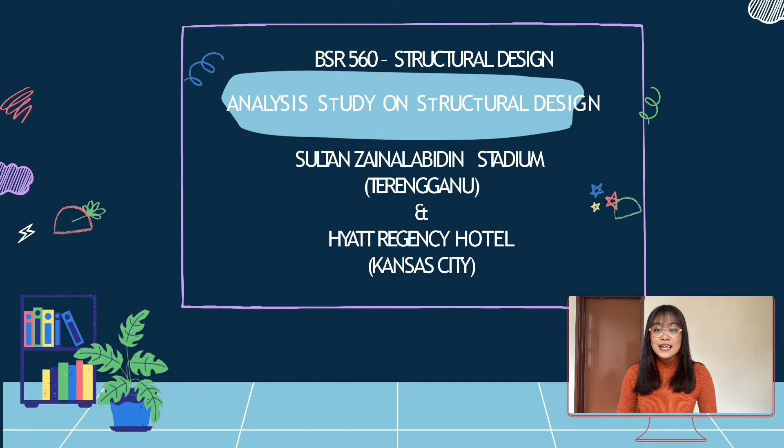In this video, we will be discussing our topic on analysis study on structural design at Sultan Zainal Abidin Stadium, Kuala Terengganu, and Hyatt Regency Hotel, Kansas City.

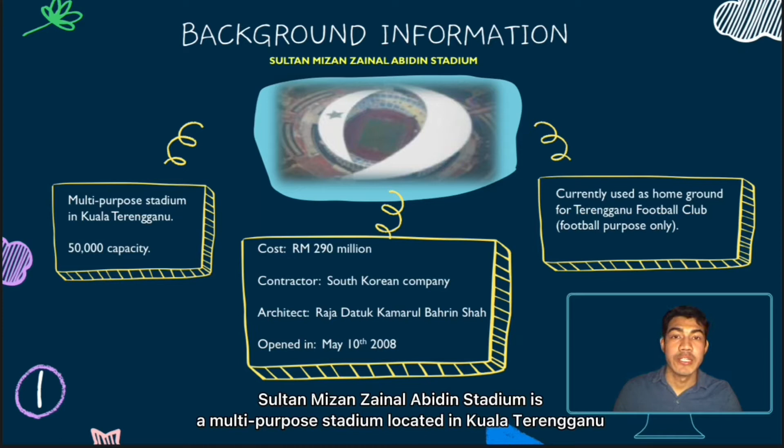Hi, my name is Muhammad Rafiq Zuhair, and I'm going to talk about background information of Sultan Mizan Zainal Abidin Stadium. Sultan Mizan Zainal Abidin Stadium is a multi-purpose stadium which is located in Kuala Terengganu that is capable of accommodating 50,000 people at one time.

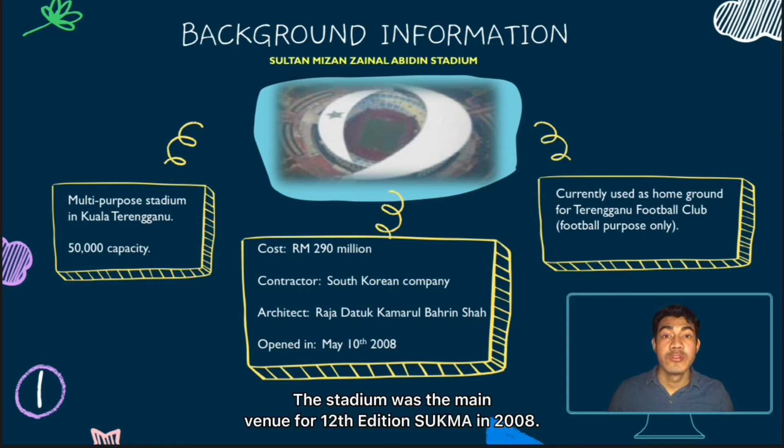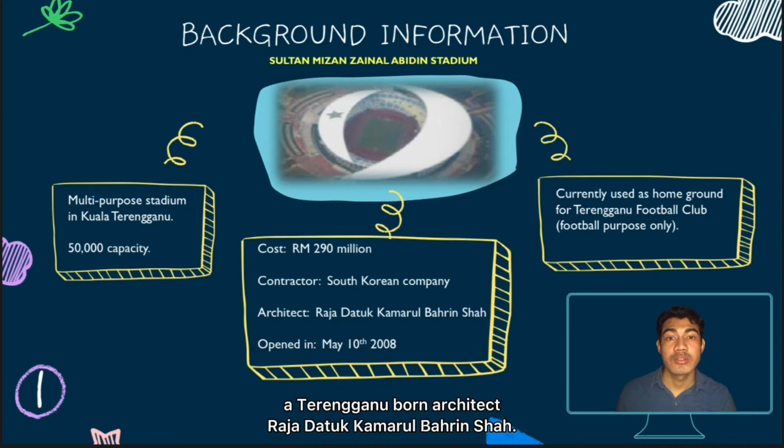The stadium was the main venue for the 12th edition of Sukma in 2008. It was constructed by a South Korean company and designed by a Terengganu-born architect, Raja Datuk Kamarul Bahrin Shah. The stadium, which cost approximately 290 million ringgit, began construction in 2005 and was officially opened on 10 May 2008 after the inauguration by Yang di-Pertuan Agong Tuanku Mizan Zainal Abidin.

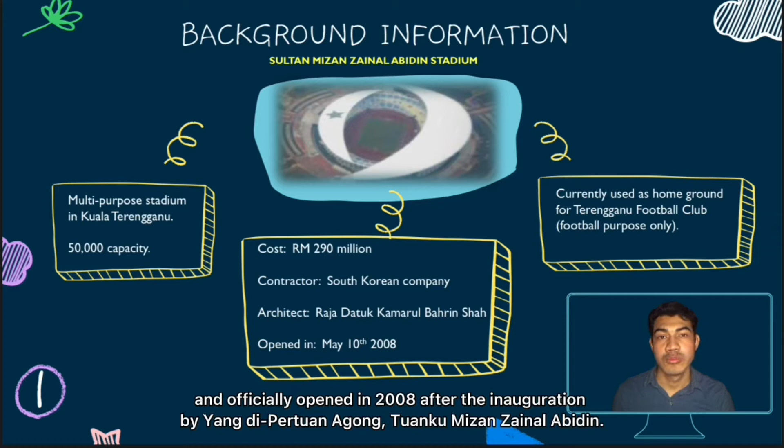Sultan Mizan Zainal Abidin Stadium experienced 2 incidents of roof collapse since it was built. The first incident was in June 2009 with no injuries recorded. The second was in February 2013, with 5 injuries recorded after another part of the roof collapsed during demolition works. Now I'm going to explain the details of the accident at Sultan Mizan Zainal Abidin Stadium.

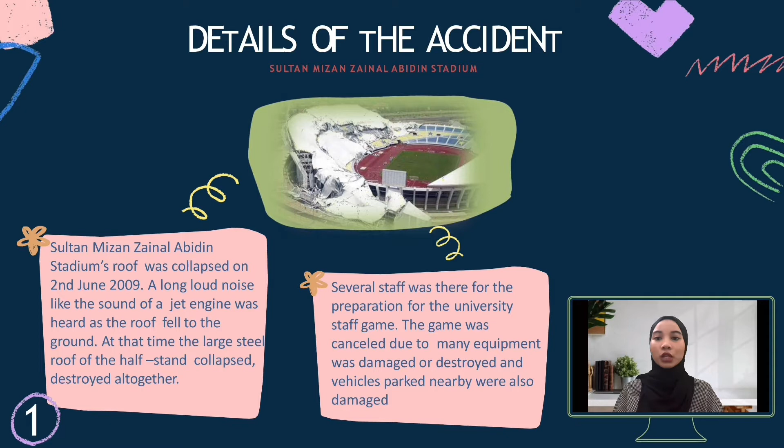Sultan Mizan Zainal Abidin Stadium's roof collapsed on 2nd June 2009. A long loud noise was heard as the roof fell to the ground. At that time, the large steel roof of the half stand collapsed and was destroyed altogether. Several staff were there preparing for a university staff game. Unfortunately, the game was cancelled as much equipment was damaged or destroyed, and vehicles parked nearby were also damaged.

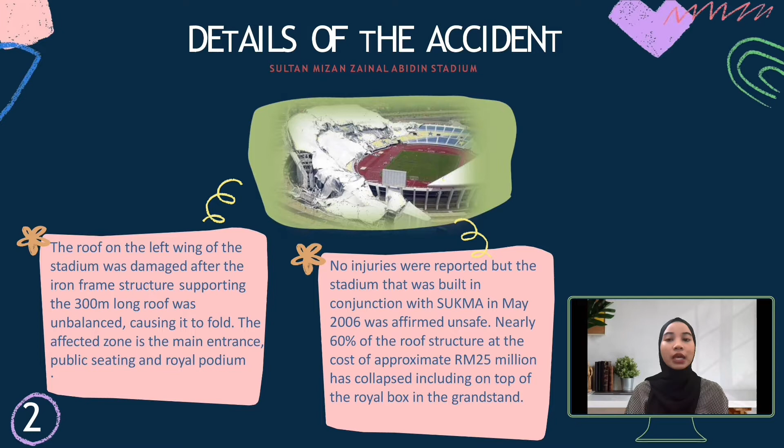The roof on the left wing of the stadium was damaged after the iron frame structure supporting the 300-meter long roof became unbalanced, causing it to fold. The affected zone was the main entrance, public seating, and the royal podium. Fortunately, no injuries were reported. Nearly 60% of the roof structure, at a cost of 25 million, collapsed, including on top of the royal

box in the grandstand. Hi, my name is Mimi Nursyada binti Ahmad Hidayat. I will explain about the building background for Hyatt Regency Hotel at Kansas City.

In 1978, the owner Crown Center Redevelopment Corporation commenced a project to design and build a 40-story hotel with 750 rooms, located at 2345 McGee Street, Kansas City, Missouri, called the Hyatt Regency Hotel. It was seen as new, modern, sleek, and impressive at the time. Construction began in May 1978 and it opened after 2 years, on 1st July 1980.

The main lobby became the main attraction for customers since it was built with a defining feature that provided a multi-story atrium spanned by 3 pedestrian walkways at the 2nd, 3rd, and 4th floors, suspended from the roof. The bridge on the 4th floor was located above that on the 2nd. The 3rd floor bridge was offset. Each bridge was roughly 120 feet long, weighed 64,000 pounds, and was suspended by 3 pairs of hangers at the ends and at uniform intervals.

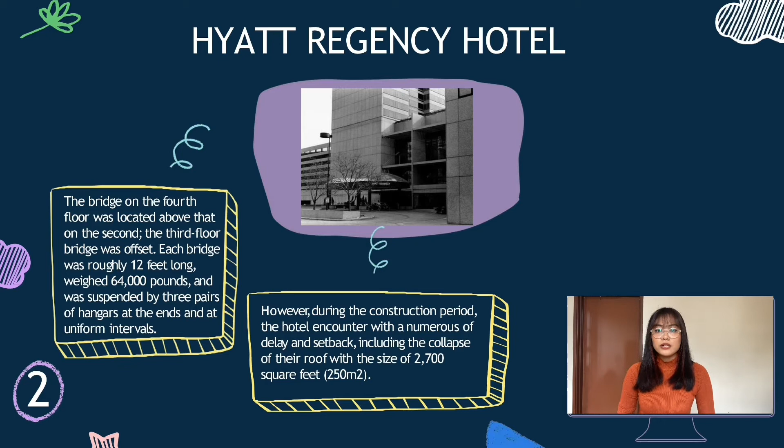However, during the construction period, the hotel encountered numerous delays and setbacks, including the collapse of a roof with a size of 2,700 square feet, equivalent to 250 square meters.

Assalamualaikum, my name is Farah Farhana and I will talk about the details of the accident at Hyatt Regency Hotel. 2 suspended walkways at the atrium area of the hotel collapsed on 17 July 1981 at around 7:05 p.m., killing 111 people, with 188 people injured.

2 of the injured people died as a result of their injuries. In terms of fatalities and injuries, this was the most severe structural collapse that occurred in the United States.

Next, we move to the comparison of case study buildings between Sultan Mizan Zainal Abidin Stadium and Hyatt Regency Hotel in Kansas City. The first one is in terms of types of building design. Sultan Mizan Zainal Abidin Stadium is a multi-purpose stadium built by a South Korean construction business in Kuala Terengganu.

Meanwhile, the design element for the Hyatt Regency Hotel consists of 750 rooms, a top-floor revolving restaurant on the 45th floor, and a 4-story open atrium.

Next is in terms of environment during the collapse. The collapse at the stadium occurred under average weather circumstances. Meanwhile, at the Hyatt Regency Hotel, before the collapse, some visitors noted tiny movement and swaying of the hanging walkways.

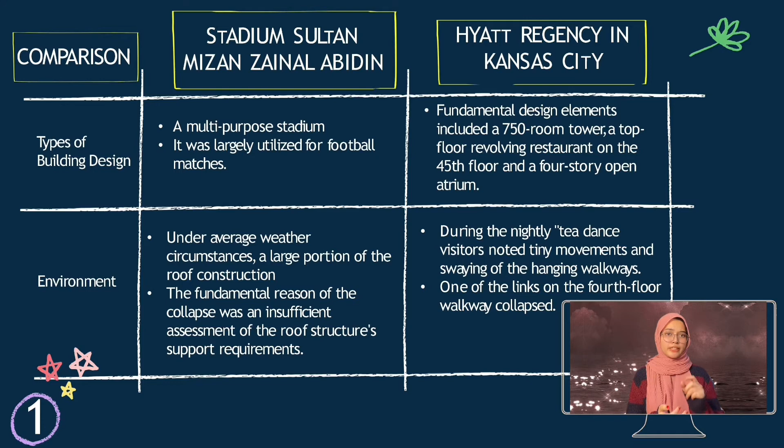Next is in terms of load capacity. The stadium has a capacity of 50,000 people. Meanwhile, the minimum value of load capacity for the Hyatt Regency Hotel is 151 kN.

And the last one is in terms of damage estimated after the collapse. For the stadium, the total damage is expected to be more than 250 million ringgit. Meanwhile, for Hyatt Regency Hotel, the total damage is expected to be $100 million.

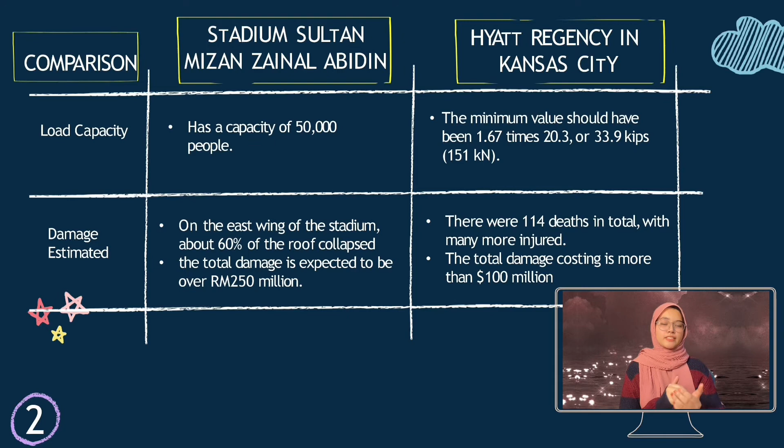Now I'm going to explain the similarity of structural failure for these two buildings. First is change of design. The roof structural design of Sultan Mizan Zainal Abidin Stadium was changed into a lightweight steel frame structure very late in the design process. For Hyatt Regency Hotel, the details of the original plan hangers for both walkways were changed over time during fabrication.

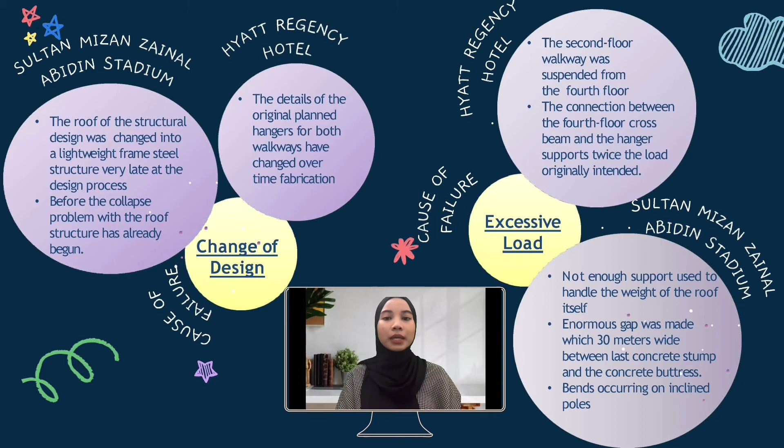The second one is excessive load. Sultan Mizan Zainal Abidin Stadium did not have enough support to handle the weight of the roof itself. A big gap was made, 30 meters wide, between the last concrete stump and the concrete buttress. Also, bends occurred on the inclined poles.

Meanwhile, for Hyatt Regency Hotel, the second floor walkway was suspended from the fourth floor. The connection between the fourth floor crossbeam and the hanger supported twice the load originally intended.

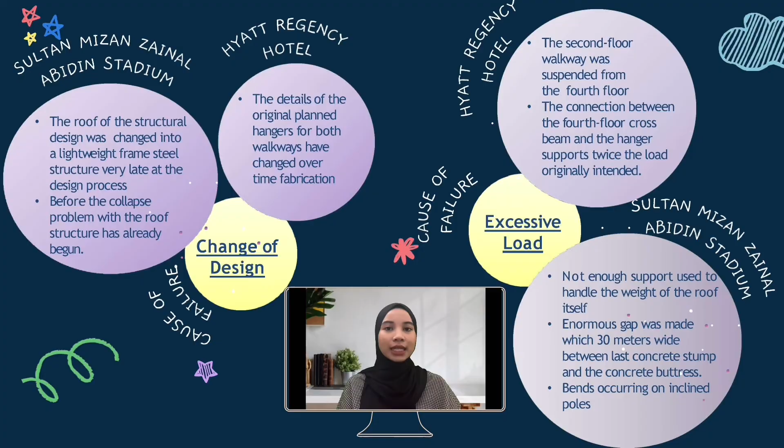The causes of the accident at Sultan Mizan Zainal Abidin Stadium, Kuala Terengganu. The major causes of the collapse are inappropriate choice of material, design failure to support actual loads, low standard quality of material, change of design at the last minute, and poor management. Since the roof was constructed by a foreign company, the design was quite complex and there was no other expertise in Malaysia that could supervise the roof for maintenance purposes after it was built.

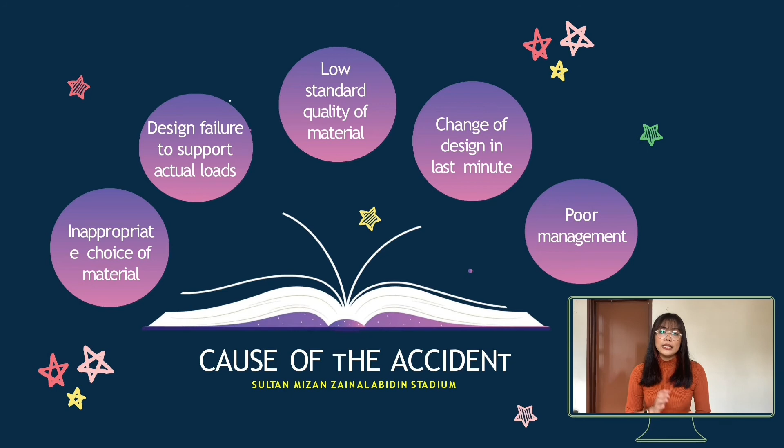Next, the cause of the accident at Hyatt Regency Hotel, Kansas City. The collapse was the result of changes to the design of the walkway steel hanger rods. The original design supported only 60% of the maximum load required by Kansas City building codes.

However, the steel company manufactured the rod and proposed two different sets: the first set suspending the fourth floor walkway from the ceiling, and the second set suspending the second floor walkway from the fourth floor walkway. They refused to thread the whole rod below the fourth floor in order to screw on the nuts to hold the fourth floor in place, as they thought the thread could receive more damage since the structure was hoisted into place.

With the new design, the fourth and second floor walkways were supported with one single beam located on the fourth floor, even though it only handled 30% of the load. Meanwhile, in the original design, the beam only supported the fourth floor, and the second floor would be supported completely by a rod.

Now we're moving on to the conclusion. The collapse of these two buildings is a crucial issue that needs to be avoided and taken care of. Other than that, the parties involved should be more responsible in making decisions and consider every aspect seriously, as it affects many lives.

They also should communicate well with each other and be honest with their professional opinions or judgments.

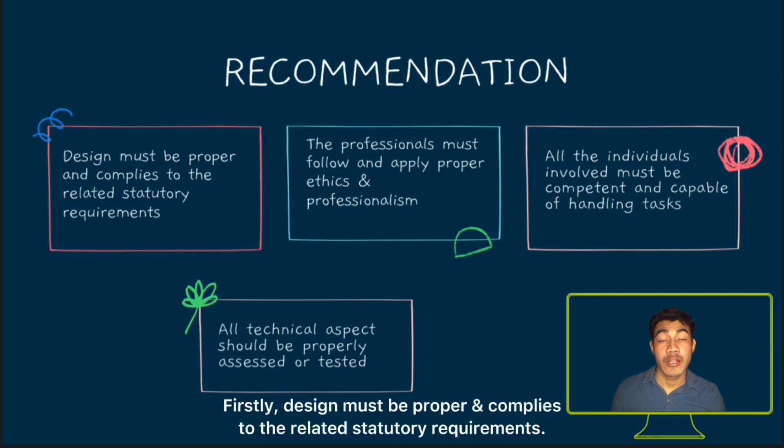Finally, the recommendation. Firstly, design must be proper and comply with related statutory requirements. The architect and engineer must ensure that the design is practical, possible to construct, and safe. Then, professionals must follow and implement proper ethics and professionalism, for example conducting proper checking on documentation and calculation before approving the project.

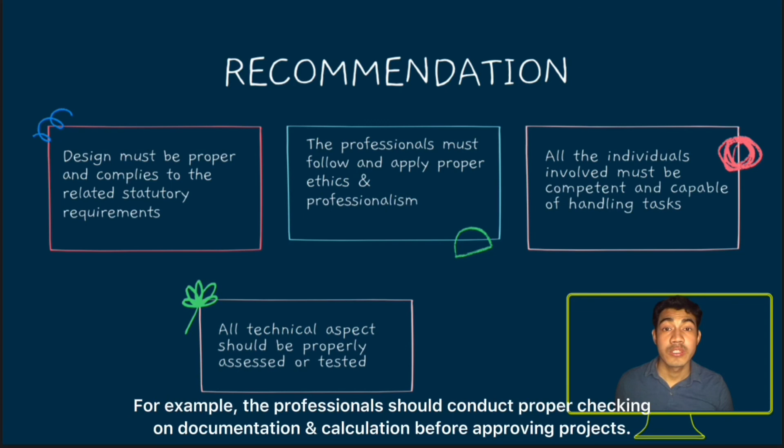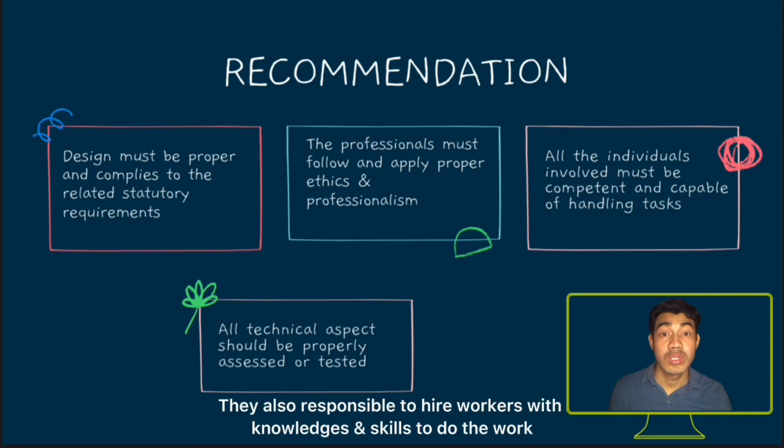Project managers should implement safety measures and quality controls during construction. They are also responsible for hiring workers with knowledge and skills to do the work. Professionals should make sure precise calculations and the right materials are used so the structure will have the required strength.